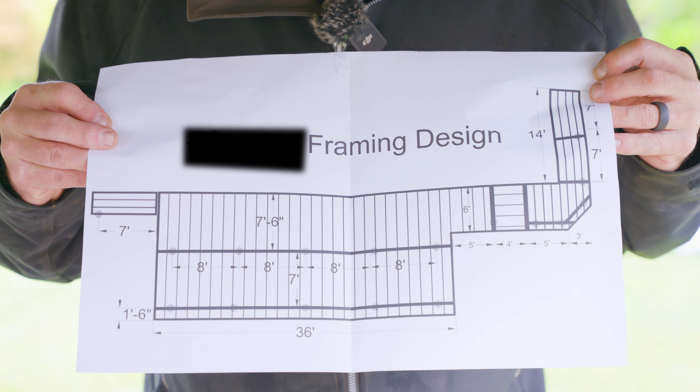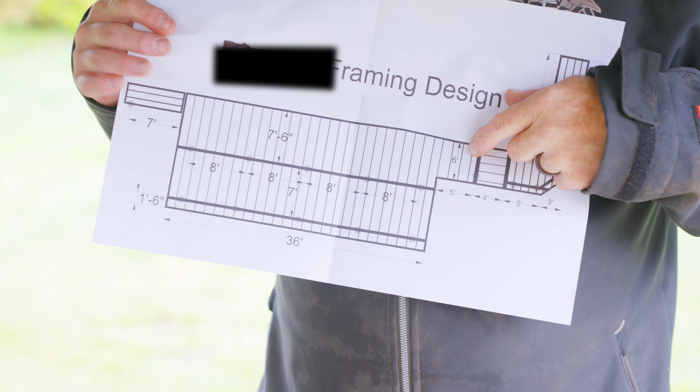There's a nice 16 by 36 foot section of the deck and then kind of some 6 foot wide catwalk going down into a narrower, about a 4 foot wide catwalk, or maybe 3.5 feet or something like that, over by the corner of the house. So right now, we've pretty much got all of our demolition done. We have a couple different levels. So this piece over here is a lower level. The main deck is flush with the door of the house, the slider.

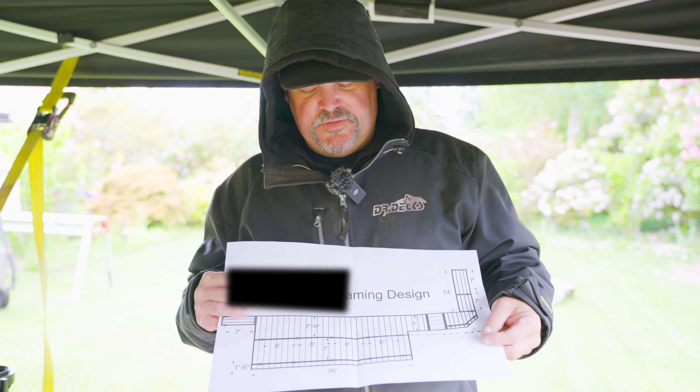And then there's a step down here, and then another step down over here to coincide with a concrete set of steps on this far end of the house. So there's 1, 2, 3, 4 different levels on this deck. Most of them are small, and the main section of the deck is all one level, which is going to be really nice for the client. And we're going to do some borders, some surface borders, and like a seam border right here in the middle of this deck too. So all the boards kind of butt into that. It looks good. And that's about all I got for you on the frame design.

So let's go over and see where we're at with demo. And then we can take the machine. We're trying to get some grading done. So I got to set up a laser, get the grading done, kind of get our area set where we want to put our helical piles, and then we'll start drilling for those as well. So just a lot of setup today, a lot of breakdown, and then some raking of dirt and that kind of stuff. And then we'll get our piles in the ground. We'll kind of go from there. So follow along and see where we end up today.

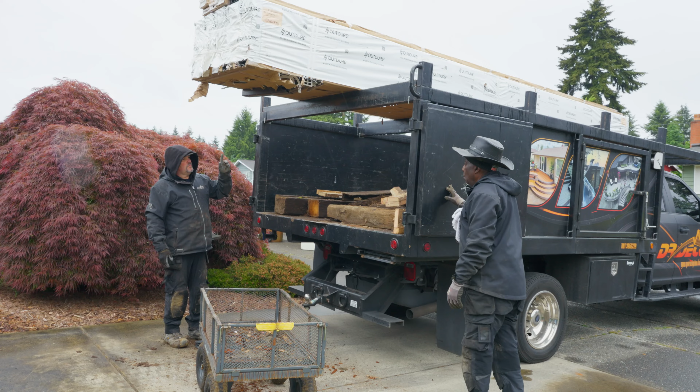You want to leave them open so you can get up to this? No, they're locked in, so yeah, good.

Okay, so I just shot some grade on the main deck area, which is all the same level, and I needed about 13.5 inches of clearance minimum to clear the bottom of my aluminum beams that we're gonna do. So it looks like everywhere is cool. So now I'm just gonna go through with the machine and kind of clean some things up, make sure that we're right. I'll rake it all out, and then I'm gonna start identifying where we need to put our helical piles, and we'll set 10 for the main deck.

And then we got to make some decisions on what else we're going to set as a helical pile, and then what we're going to use as precast footing blocks. So far, so good. We'll get those going, and then we'll go from there.

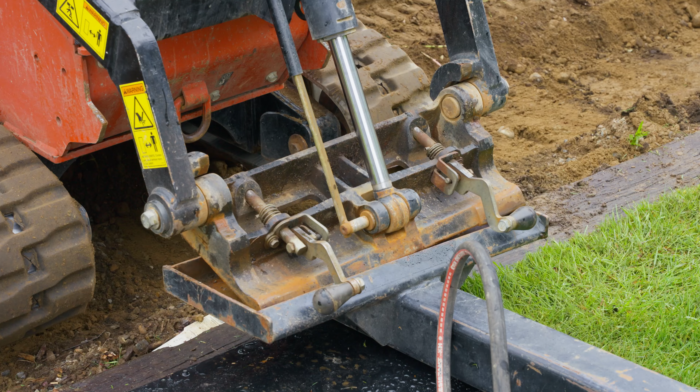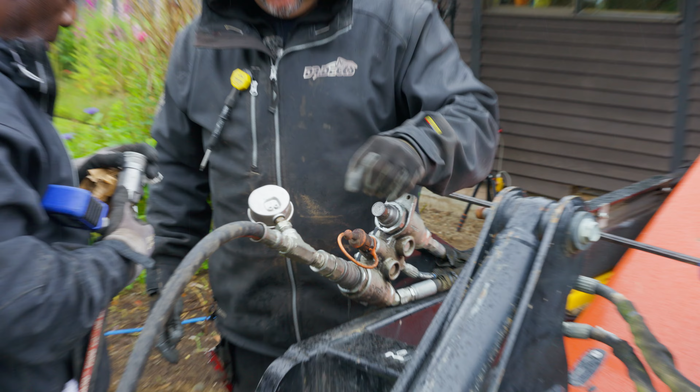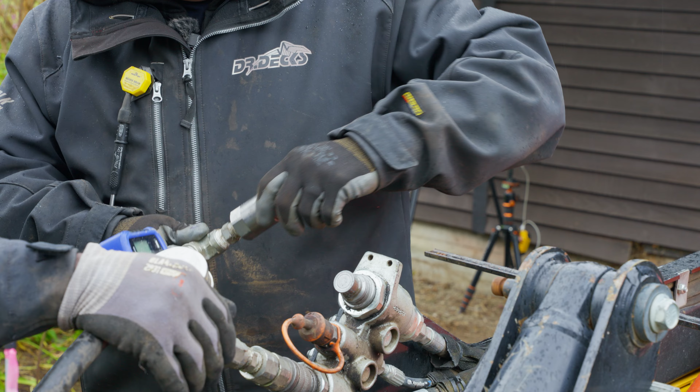It's like this fitting is having some issues. WD-40? I don't know. This is magnetic, right? No, it's just a hydraulic fitting. This one's working great, but this one's not wanting to quite clamp on there. Put it on here for me. Well, hold on. I don't understand. It's not rotating? Well, it's not doing nothing.

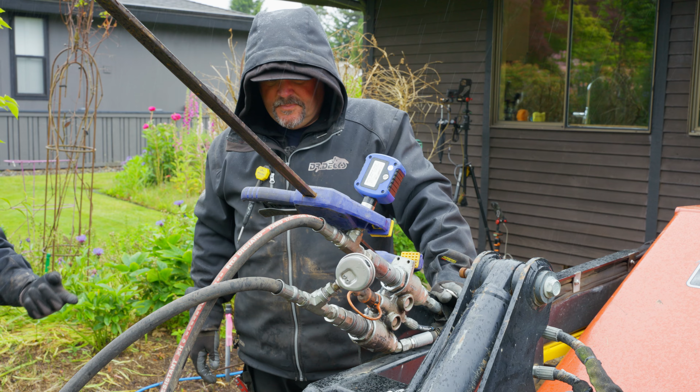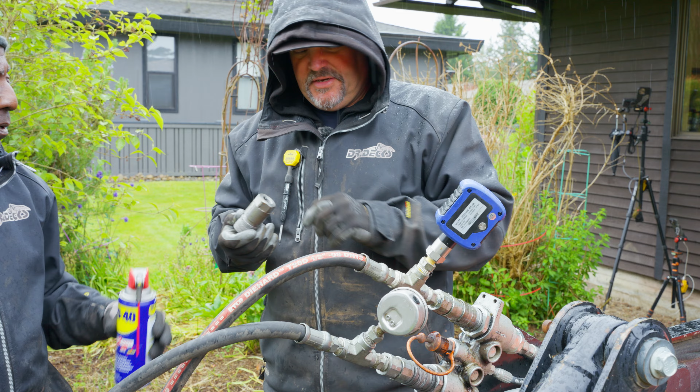I don't get it, man. I might have to go buy a new fitting. I've had to do it before, but what a pain in the butt. I just had this on. There we go. Boom, done. This one, I don't know what it is, but this sat for months and now it works. I just grabbed this out of the toolbox in the side of my truck. It's been sitting in there for months.

Okay, so had a little issue. I don't know what it is. I'm sure there's some hydraulic mechanics out there that watch this channel. This is the old fitting that did the exact same thing that fitting did. Something got locked up, maybe some dirt or something is inside of this fitting. And this one had been rolling around in my toolbox for the last year.

And I thought, well, what the heck, instead of running to the hydraulic store to get another fitting for $100 or whatever, let's just throw this old one on, and it clicked right on. So I hooked it up and now it's on. So now we can start driving our helical piles.

I also have this fancy new digital gauge that helps us read our pressures for the helical piles. So that'll be interesting to use as well to see if it's easier to read than these analog gauges are. So we'll see. The other one, on the last job, started malfunctioning. So I had to get something new anyway.

So I thought, well, I'll try this new digital one and see if it puts out a more accurate reading or something that at least we can jive with. But now finally got this fixed and we can start driving some piles. So let's get on it.

We are ready to start digging piles, but before we do, we need to identify where our piles need to go. So for the main deck, there's 2 rows of beams and there's 5 piles for each row of beams. The piles are gonna be about 8 feet apart. So I'm gonna find the center of the deck.

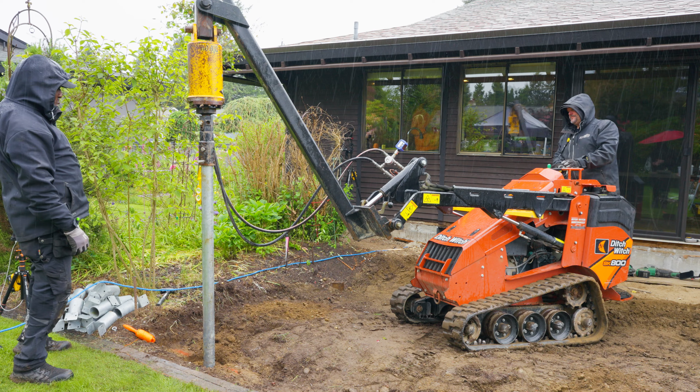Okay, we're getting closer to pressure, but we're a little out of level. Okay, disconnect and we'll put it back in, and then I'll be able to move it back.